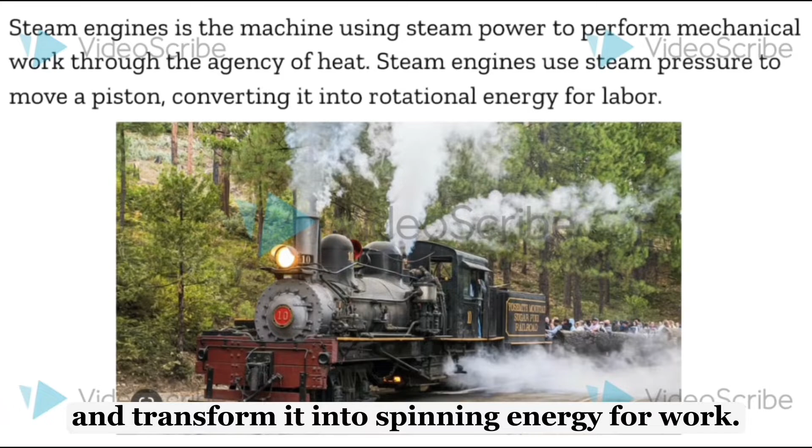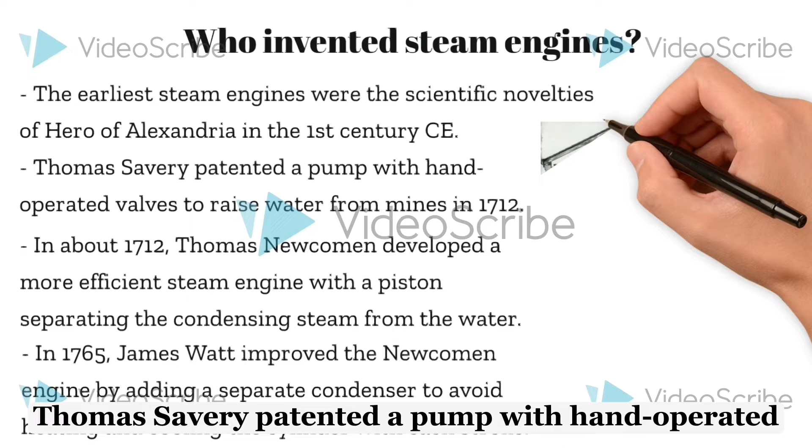But who invented steam engines? The earliest steam engines were the scientific novelties of Hero of Alexandria in the 1st century CE, but not until the 17th century were attempts made to harness steam for practical purposes. Thomas Savery patented a pump with hand-operated valves, and Thomas Newcomen developed a more efficient steam engine with a piston separating the condensing steam from the water.

James Watt improved the Newcomen engine by adding a separate condenser to avoid heating and cooling the cylinder with each stroke.

What is a steam engine used for? Before, steam engines were used as the prime mover in pumps, locomotives, steam ships, traction engines, steam lorries, and road vehicles, and were central to the Industrial Revolution.

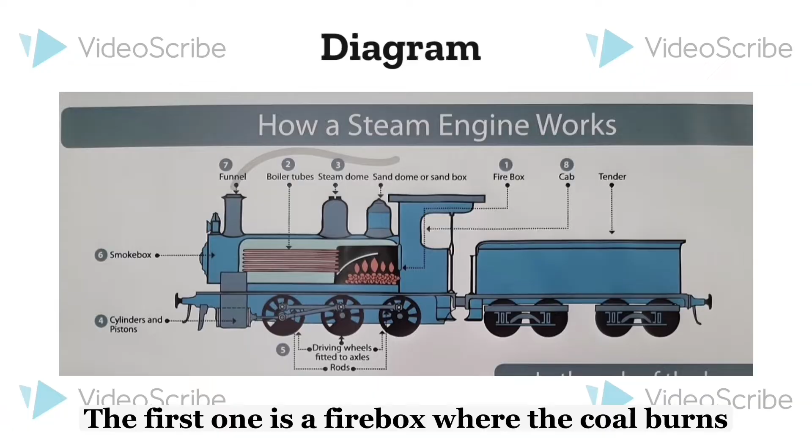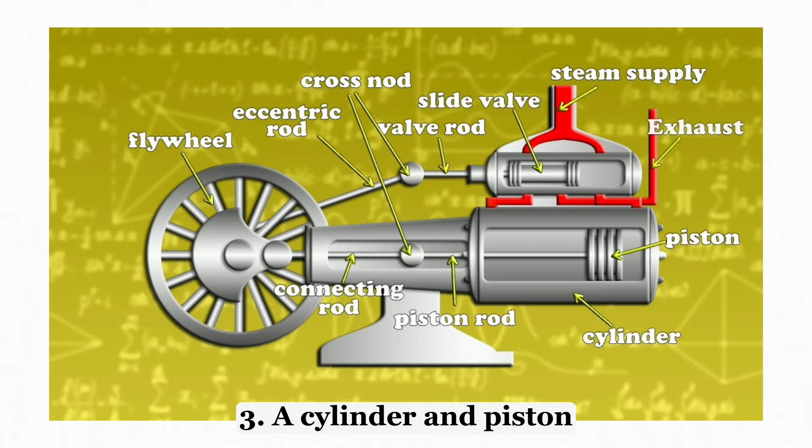This is a steam engine diagram. There are four main parts needed to make a steam engine work. The first is a firebox where the coal burns. The second is the boiler for water that the fire heats up to make steam. Number three is a cylinder and piston, a bit like a bicycle pump but much bigger.

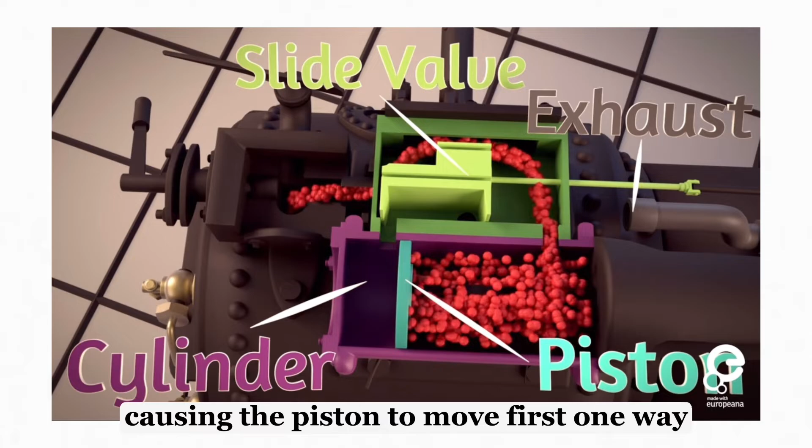Steam from the boiler is piped into the cylinder, causing the piston to move first one way, then the other. Number four is a machine attached to the piston. How does a steam engine work?

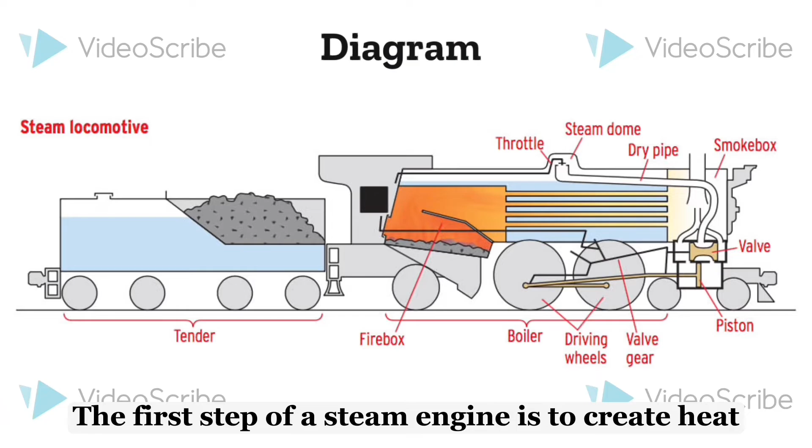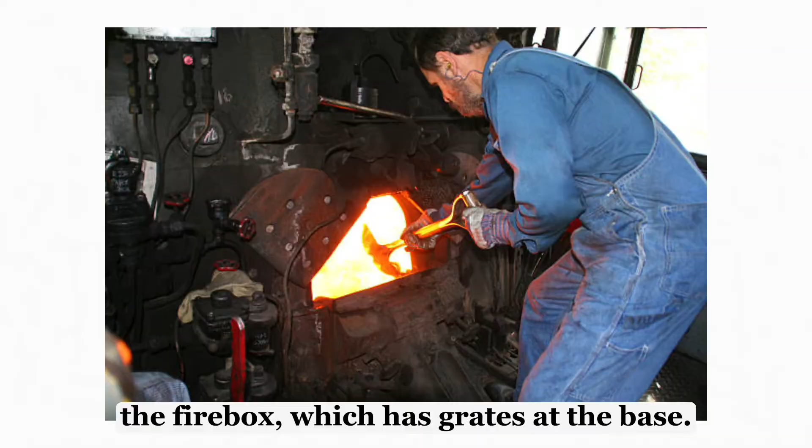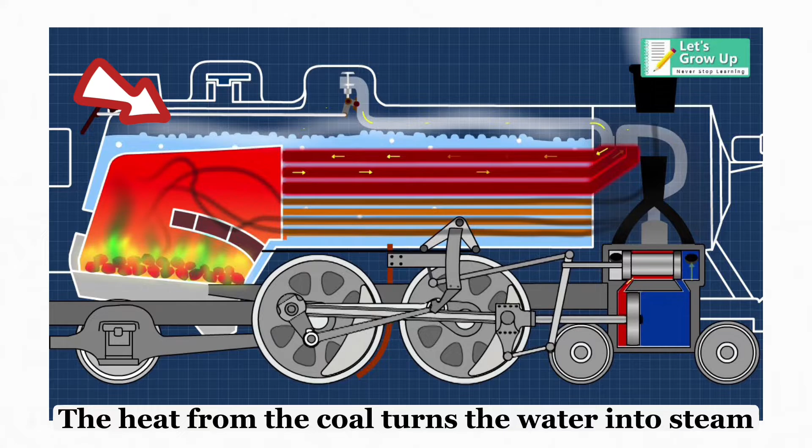The first step is to create heat by using coal or oil as fuel. This is done by spreading the coal throughout the firebox, which has grates at the base. The firemen also need to monitor the level of water, which is carried to the outside of the firebox using an injector. The heat from the coal turns the water into steam, which rises to the top of the boiler and is collected at the steam dome.

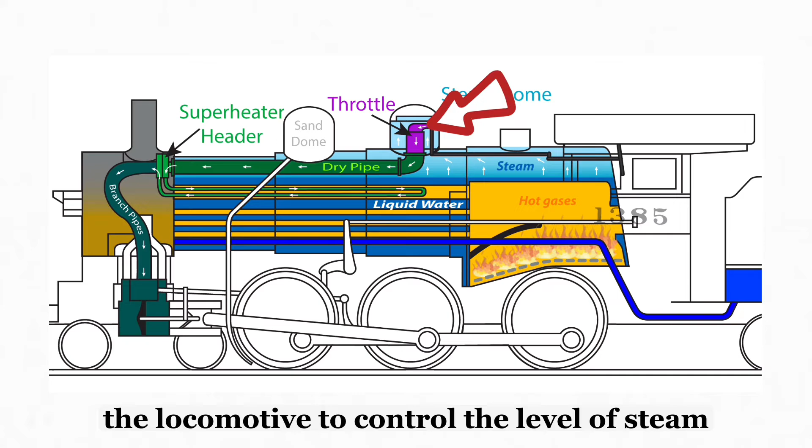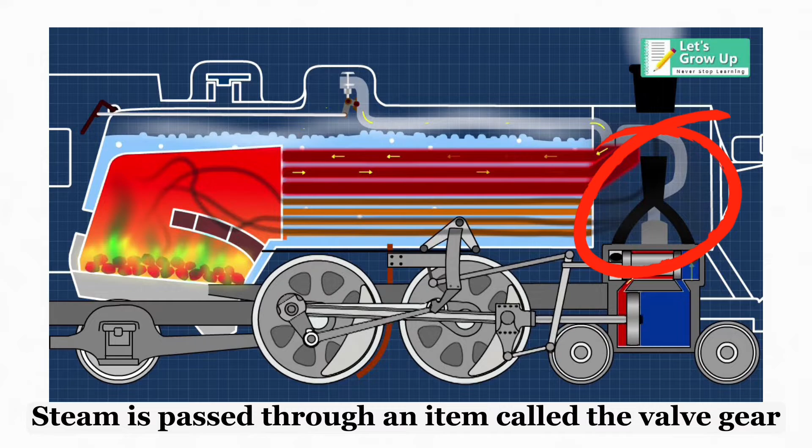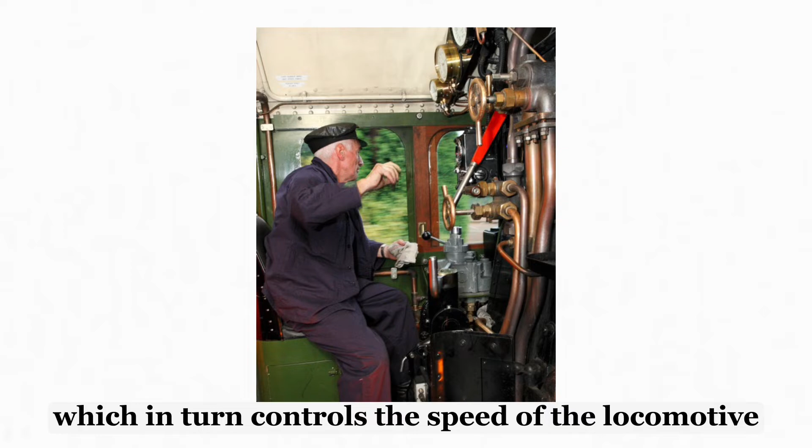The engine driver uses a throttle in the cab of the locomotive to control the level of steam being transferred to the pistons through the regulator valves. Steam is passed through an item called the valve gear, which controls the allowance of steam into the cylinder. In the cab, a lever allows the engine driver to maintain the actions of the valve gear, which in turn controls the speed of the locomotive and whether it is moving forwards or backwards.

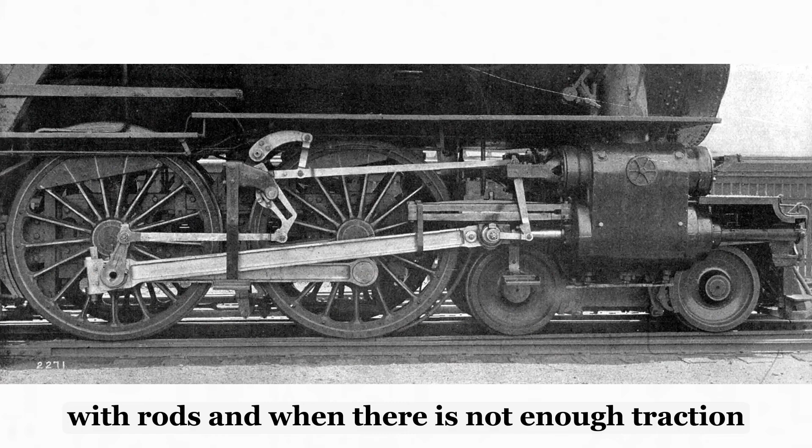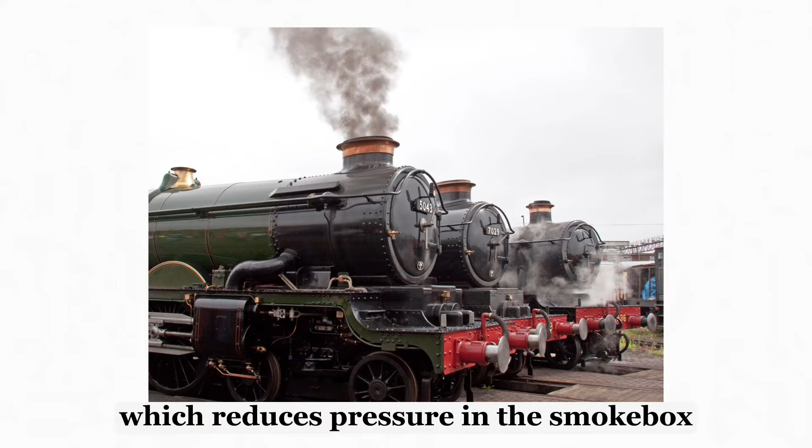The pistons are connected to the driving wheels with rods, and when there's not enough traction, sand from the sand dome is released by pulling a lever in the cab, and it's dropped onto the tracks. Steam is expelled through the smoke box into the funnel, which reduces pressure in the smoke box, causing gases from the firebox to be drawn through the boiler tubes. This produces a repetitive chuffing sound as the locomotive is on the move.

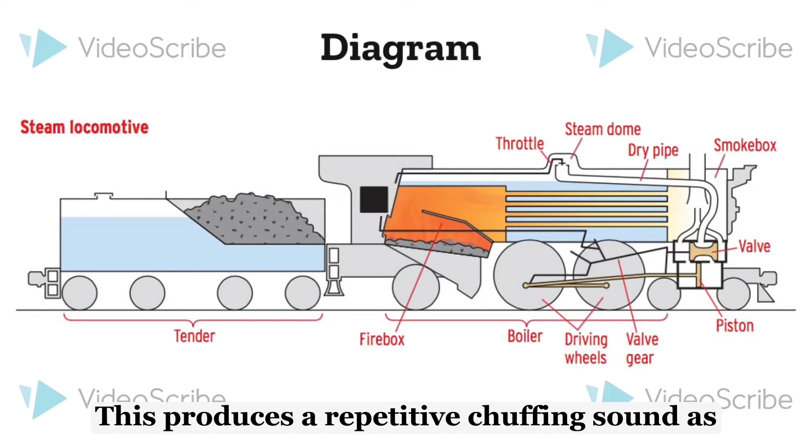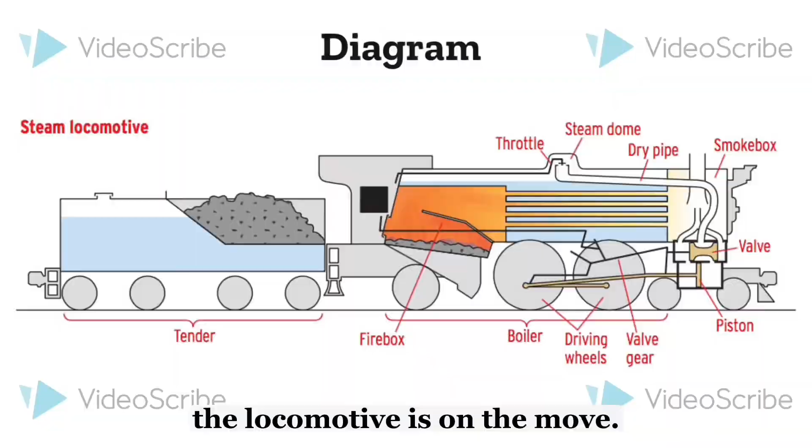Finally, spent steam and coal smoke ascend through the funnel and out of the engine, which is the smoke that can be seen coming out of the top and then trailing behind the locomotive.

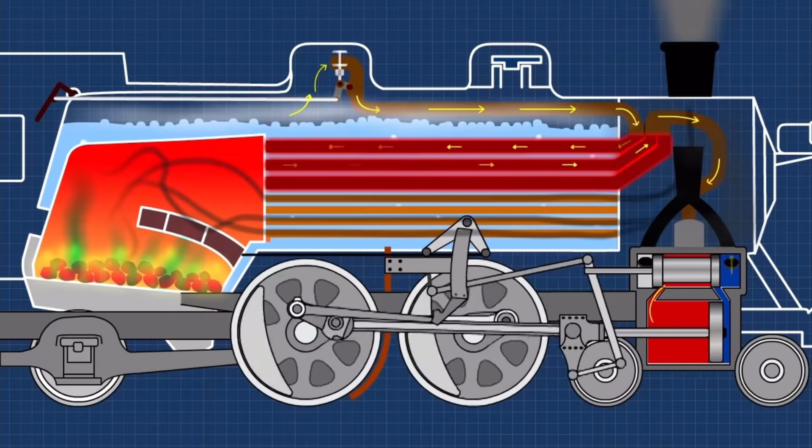Advantage of steam engine: steam engines make it simple to work, decide, produce, market, specialize, and grow profitably without having to think about the less prevalent presence of waterways. With the development of steam engines, cities and villages began to be centered around the industries that produced them.

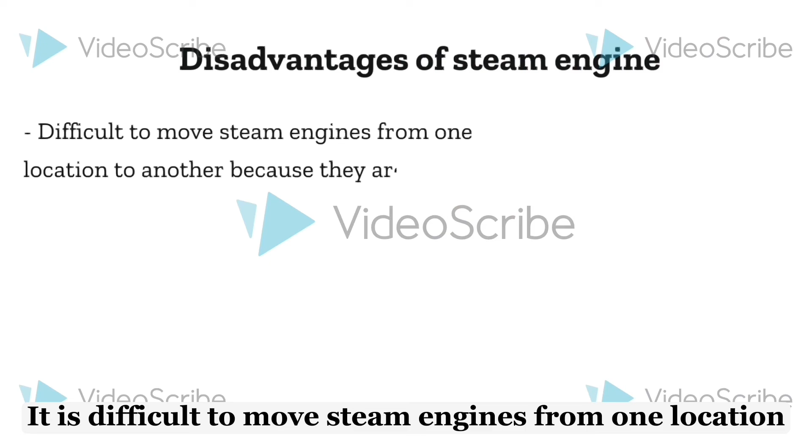Disadvantage of steam engine: it is difficult to move steam engines from one location to another because they are typically large and heavy. Compared to other types of thermal engines, steam engines are less efficient.

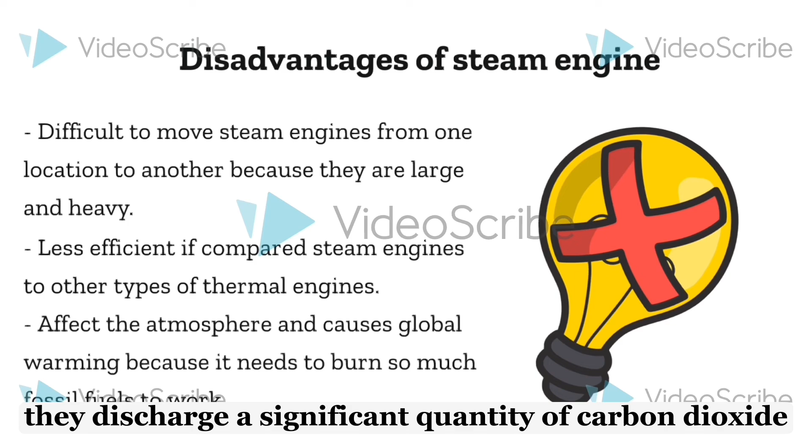In order to produce steam or heat, a steam engine burns natural resources like coal, so as fossil fuels are consumed, they discharge a significant quantity of carbon dioxide, a greenhouse gas, into the atmosphere. Global warming is brought on by greenhouse gases, which capture heat in our environment.

In conclusion, the steam engine was a significant contribution to the Industrial Revolution and helped civilization progress in a variety of fields, including mining, transportation, and the textile industry.